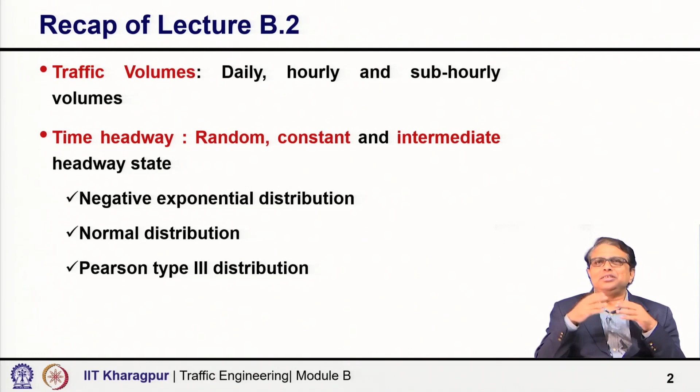At low flow level, it is something random. As the volume or flow increases and is near capacity, platooning happens and the majority of vehicles follow a constant headway; at intermediate flow levels, it will be something in between. I also explained with examples how negative exponential distribution, normal distribution and Pearson type 3 distribution can be fitted to observed highway data and how they represent it, primarily to conclude that the distribution of headway depends on the flow level or volume level.

At low volume level, the negative exponential distribution will reasonably indicate a good fit to the data, but as volume increases at high flow level, negative exponential may not work. In that case, Pearson type 3 distribution may fit better. So we must keep in mind the volume level we are considering when fitting a distribution to an observed data set, because the distribution likely to fit a given data will be a function of the flow level.

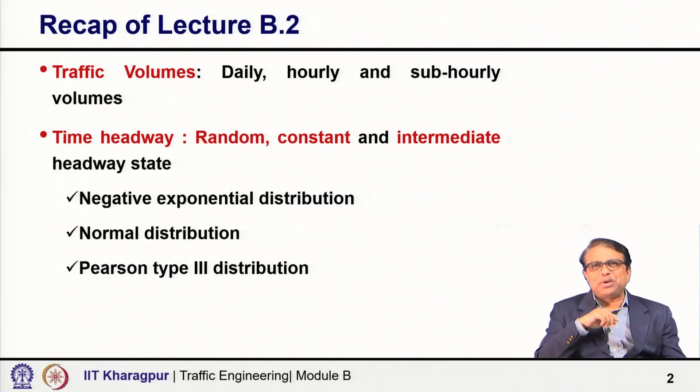Now, with this background, let us discuss traffic density and then the relationships. Density may be defined as the number of vehicles occupying unit length, say 1 kilometer of road, at a given instant of time. So how many vehicles are there occupying that 1 kilometer length? We can express density in terms of number of vehicles per kilometer.

A direct measurement of density is possible, but sometimes difficult in practical sense, because you need a higher vantage point from where you can clearly view a reasonable length of the road. You want to do photography or videography, so you need a higher vantage point and then focus the camera to take a snapshot or video. Such a vantage point may not be available in all contexts, at all places.

So the direct measurement may be difficult, but density can be computed using this equation: flow by speed. Flow unit is vehicle per hour, speed is kilometer per hour, so dimension-wise you get vehicle per kilometer, which is the unit of density. I will explain further how these relationships are valid and formulate this relationship in more detail to convince you better.

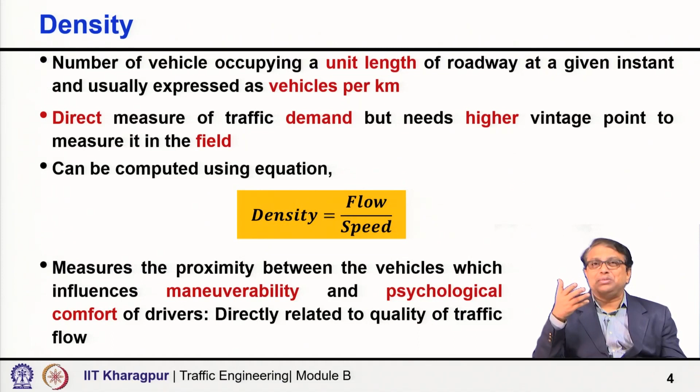Density measures the proximity between vehicles, which influences the maneuverability and also the psychological comfort of drivers. If you are driving a vehicle and all around you there are too many vehicles, that means density is high, and there will be a psychological effect on your driving behavior and maneuverability. That is why density is a very important stream parameter, which directly relates to the quality of traffic flow. Higher the density, the lesser the freedom in movement, and that way the traffic stream or driver behavior gets impacted.

Density can be expressed in the range starting from 0, because if you take a kilometer length of road during early morning hours, extreme lean hours, there may not be any vehicle. So you take a snapshot and you do not get any vehicle on the road—that is what is shown here, 0 density. If I take a snapshot here, I do not see any vehicle, and the road is marked for 1 kilometer, and over this length there is no vehicle.

So, the density is 0. On the other hand, at the maximum level, the density can attain a practical maximum value when vehicles are almost jam packed, one after another with minimum gap in between, minimum practical gap in between. So, that is the maximum density you can get under that condition. That is called the jam density.

The jam density is basically the highest value of density you can get. At that time traffic volume approaches nearly 0, because vehicles are practically not able to move. So, if you are counting the vehicles passing at a given time, you will find it is nearly 0. So, the volume is 0, the speed is also 0, because vehicles are not able to move, but the density is at its maximum. That is called the jam density.

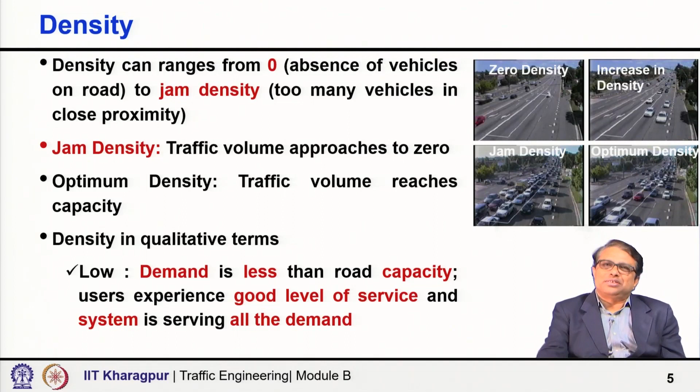At medium level, the demand is actually approaching capacity. So, the density is higher than the previous one, freedom of movement will be lesser than the previous state, and users are experiencing overall lower level of service, but the system becomes most productive in terms of vehicle kilometer travel. As I said, since you are approaching capacity, your throughput is actually maximum. You get a traffic volume which is almost equivalent to the capacity of the road. So that is, in one sense, the optimal use of the facility. You are able to discharge maximum number of vehicles through the road system.

Density could be even higher, and when will it be higher? When the demand exceeds the road capacity. Whatever the road can accommodate, you are trying to pass through more than that number of vehicles, demand is higher than the capacity, and then upstream of that section, not really at the bottleneck where the road is narrow, but upstream to that.

Suppose a 3 lane road is there and then gets reduced to 2 lanes, whatsoever may be the reason. Maybe the road could not be widened, or maybe some maintenance work is going on, and if the demand is more than the 2 lane can serve, obviously only 2 lane worth of demand can be served through that bottleneck, and upstream of that bottleneck where there are actually 3 lanes, the density will be very high, because the flow will be unstable in that section.

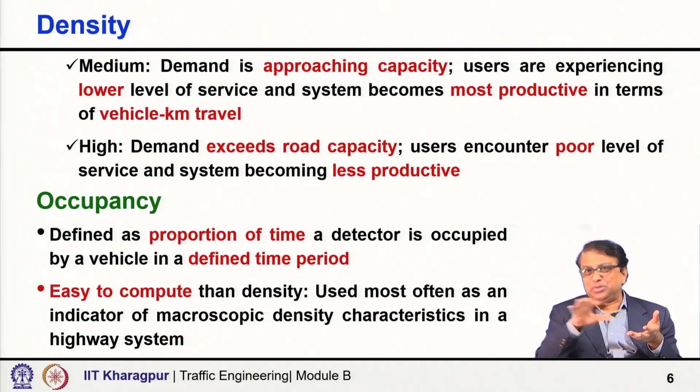It is easy to compute density from occupancy, and it is used most often as an indicator of macroscopic density characteristics in a highway system, simply because you can easily put a detector on the road and measure occupancy, rather than finding a vantage point to photograph the whole road stretch.

Once the occupancy is known, you can also calculate the density using this simple equation. OC is the proportion of time occupied by a detector, divided by VL plus DL. VL is the average length of the vehicle, and DL is the length of the detector.

Different vehicle types are passing through the detector, so you take an average vehicle length to represent the stream, and DL is the detector length. Why VL plus DL? Because if a vehicle is entering, the moment a part of the vehicle enters, the detector will show it is occupied, and it remains occupied until even a small part of the vehicle at the rear end is still on the detector. So it should be detector length plus vehicle length in the denominator.

Let us take an example. Suppose the detector records an occupancy of 0.2 for a 15-minute analysis period. If the average length of the vehicle is 4 meters and the detector is 75 centimeters or 0.75 meter, then what is the density?

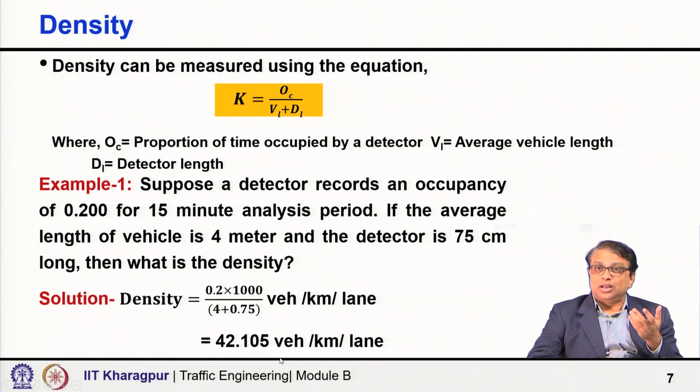You can directly use this formula. OC in this case is 0.2, VL is 4 meters, DL is 0.75 meters, and since we want to express density in vehicles per kilometer, it will be multiplied by 1000. So you get somewhere around 42.105 vehicles per kilometer per lane as the density.

Now going to another measurement, a microscopic measure. We discussed time headway, and here we are talking about distance headway. Time headway is the time gap between the passage of the same point by two vehicles, front bumper to front bumper. I observe the front bumper of a vehicle crossing this point and record the time, then the next vehicle's front bumper touches this point and I record that time. The time difference is the time headway for this pair of vehicles.

Similarly, what is the actual distance between front bumper to front bumper? That is the spacing, or space headway. I can take a snapshot and simply measure the distance between the front bumper of the vehicle in front and the front bumper of the immediate following vehicle. So spacing is in meters, meters per vehicle in a way.

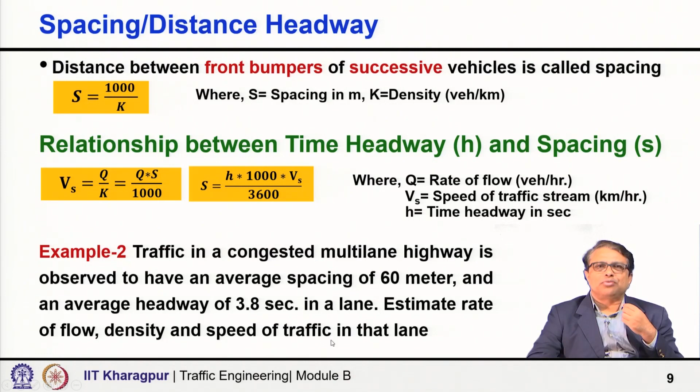Spacing is 60 meter. So what is the density? Density will be 1000 by 60, so 16.67 vehicles per kilometer.

I know that 3.8 seconds is the headway. So what is the flow? 3600 by 3.8, so you get the flow, and once you know the flow and you know the density, you can get the speed. Simply, speed will be flow by density.

Now let us take another example. Two cars A and B are moving in a racing track continuously for 2 hours. Assuming that no other vehicle is present on the track, calculate the maximum space headway between the vehicles within the first 1 hour.

The expressions for distance, that is d, distance travelled in t hours, are given separately for the two vehicles A and B. For vehicle A, dA equal to 60t, for vehicle B, the distance dB is equal to 60t square. So what is then the spacing at any instant of time? It is 60t minus 60t square, that is the distance between the two vehicles.

And we are talking about when the distance will be maximum. So we differentiate with respect to time. We take the derivative, ds/dt equal to 0, and you get t equal to 0.5 hour. 0.5 incidentally is within 1 hour.

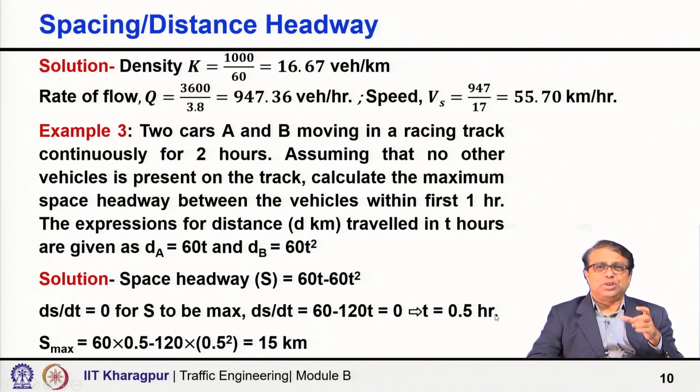And S max then will be how much? Simply put this time t: 60 into 0.5 minus 120 into 0.5 square. So you get 15 kilometer. So at 0.5 hour, the distance or the spacing between two vehicles will be maximum, and that is equal to 15 kilometer.

Now let us go to the next part. So far I have talked to you about the traffic volume, speed, and also in today's lecture first part I have talked to you about the density. Now these speed, flow and density are all related. So let us try to understand their relationships.

First let us see how we can convince you that there is a relationship. Let us consider q equal to rate of flow, vehicle per hour, k is the density, vehicle per kilometer, and v is the space mean speed. Remember that it is not TMS, it is SMS, because we are taking a stretch of the road and for that traffic stream as a whole we are saying what is the speed over that distance.

In this case, we will consider a 1 kilometer stretch now, so that is the space mean speed. Now if we consider 1 kilometer of road, then all the vehicles, each of them is travelling at the same speed, that is v kilometer per hour, and the density of the stretch is k vehicle per kilometer.

So by definition, how many vehicles are there within this 1 kilometer stretch? K number of vehicles, each travelling at a speed of v kilometer per hour. So if this is my first vehicle from the front, after 1 kilometer, the last vehicle I will get, if I count the vehicles, will be the kth vehicle, because the density is k vehicle per kilometer.

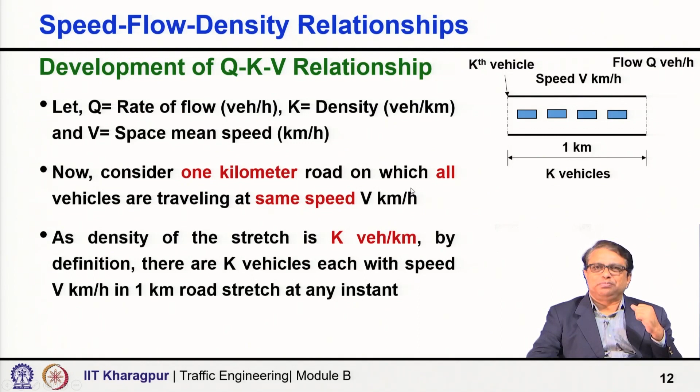Now if the flow is recorded at the end of 1 kilometer, if an observer is actually counting the vehicles passing through in an hour, the observer will get q vehicles per hour, because the flow rate is q vehicles.

So now you consider a vehicle at the start of the kilometer, that means the kth vehicle. How much time will it take to reach the end? That vehicle has to travel 1 kilometer. How much time will it take? It will take 1 by v hour, because the speed is v kilometer per hour, so in 1 hour I can cover v kilometer. So to cover 1 kilometer, I will take 1 by v hour.

So that is simple. But again, the kth vehicle will reach the end of 1 kilometer after k by q hour. How am I saying that?

Actually, 1 by q is what? Headway, time headway. So the kth vehicle to reach, how much time will it take? K into 1 by q, that much hour. So 1 by v equals k by q, and that gives you this extremely interesting fundamental relationship of traffic flow: q equals k into v, flow equals speed into density.

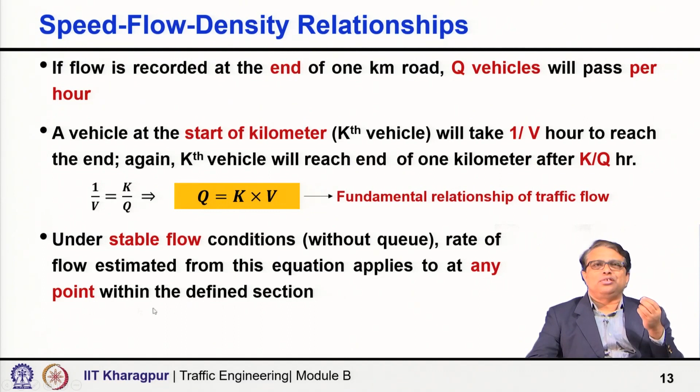Now, under stable flow conditions, all vehicles are moving steadily, not a stop-and-go situation. Rate of flow estimated from this equation applies at any point within the defined section. But if it is a forced, unstable flow, then it may change from point to point, not always exactly the same. Then the rate of flow computed from this equation will represent the average of all points within the section.

This relationship is often useful to estimate density. As I said, it is much easier to measure speed and flow rather than density. So once the relationship is known and you have measurements of flow and speed, you can calculate the density. This equation suggests that different k-v combinations can give the same q value, because q equals k into v.

So different k and v combinations can give you the same q value. Yes, that is true, but remember that all these values will change simultaneously, all these parameters will change simultaneously. So while different k-v combinations can give you the same q value, there are additional relationships that also have to be kept in mind.

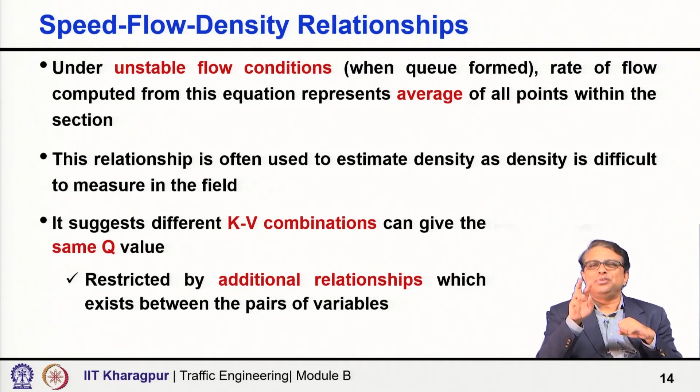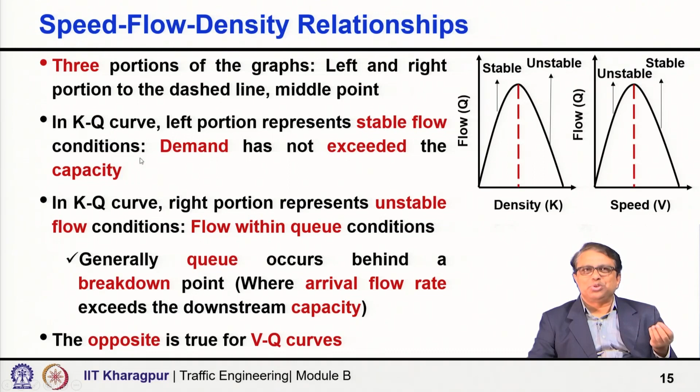The characteristics of the curves vary greatly depending on the local prevailing conditions. So exactly what the equation will be, I have not said so far. The equations may vary, the model may vary, it will depend on local conditions and so many other things, but the basic nature will remain valid.

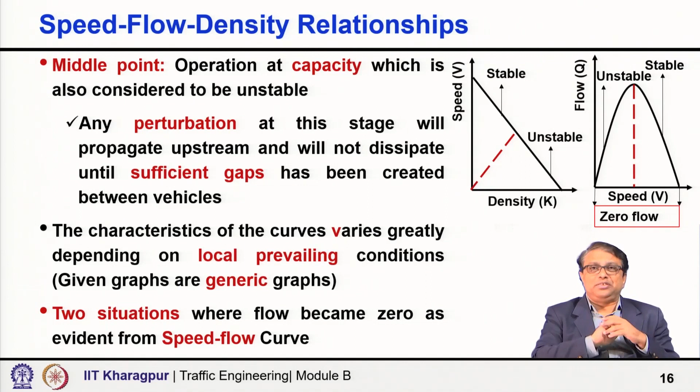Although speed density relation directly describes the behavior of drivers, most often the speed flow curve is used, as density is difficult to measure, the same point I have mentioned earlier.

Now let us consider some practical issues. Let us take a section of road, a 3-lane road, but in between a portion of the road has capacity of only 2 lanes. Maybe due to land acquisition issue you could not widen the road completely, or maybe there are 3 lanes but 1 lane is under maintenance or some construction is going on, so it is not in use.

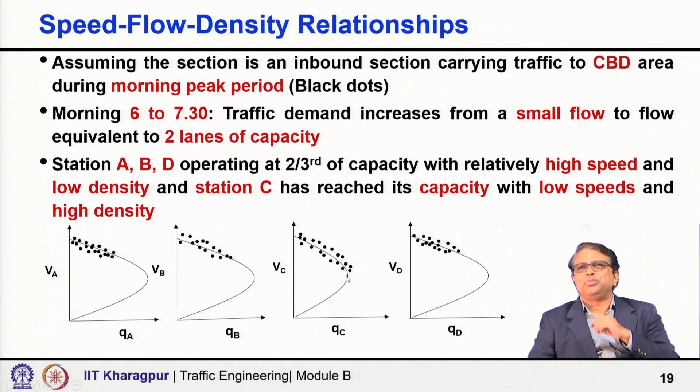Speed here will be higher because on the speed flow curve this point is at 2/3 of the capacity, whereas it has come down up to capacity. So obviously, the flow has gone up to capacity, the speed has come down further. So the speed of vehicles on section C will be lower, but anyhow all the vehicles will be able to pass through. Now, let us consider 7:30 to 8 o'clock.

Now consider that the demand is equivalent to the capacity of 2.5 lanes, not 2 lanes anymore, but further increased. So what will happen? This section's capacity is only 2 lanes, so only demand equivalent to the capacity of 2 lanes will be able to pass through this section, nothing more. And because only demand equivalent to 2 lane capacity will pass through this section, section D will only receive demand equivalent to 2 lane capacity, nothing more than that.

And there will be immediate accumulation of vehicles immediately upstream of section C, that is on section B, and section B will now go from stable operation to forced flow operation because of this bottleneck and excess demand.

Section A, which is further upstream away from this influence, will still have 3 lane capacity and it will operate with 2.5 lane demand without having much problem, because the demand is still less than the capacity. In section B, although there are 3 lanes, so capacity is not an issue, but the operation will switch over from high speed low density to low speed high density forced flow operation.

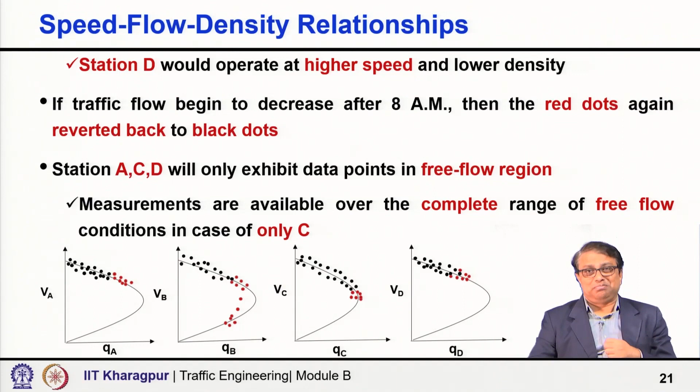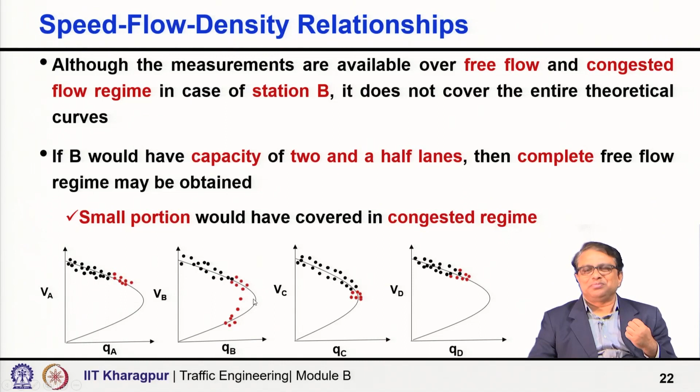So although measurements are available over free flow and congested flow regimes in section B, it does not cover the entire theoretical curve. If B would have had a capacity of 2.5 lanes instead of 3, some of the red points would have come here and also gone to force flow condition because of the bottleneck or the constrained capacity in C section, but you would have gotten some more points probably almost up to capacity.

So two important points to take away from this discussion. One, location limits the range of flow, speed and density values where you are measuring, and therefore for validation of models, the data set used may affect the results and comparison between models. I may not observe everything in every context. It depends on where I am taking measurements and under what traffic conditions. Only that will constrain what kind of data I will get.

Quickly I will show you two examples. This is the real world data for a high speed freeway. High speed freeway, normally we are able to cover quite a good range, low to almost near capacity, to some points even in the force flow range, but you can see you may not still get 100%.

So this example, the VK plot showed consistent data points and displays somewhat like an S shape or reverse S shape, whatever you say, and it gives an indication that free flow is somewhere around 60 km per hour and K jam is somewhere around these values, but I cannot conclude because I did not get points touching the K axis. So I still do not know. I know it came down almost up to 130, but it did not touch. So I cannot say that jam density is 130. I know it is even beyond that and I cannot tell the value.

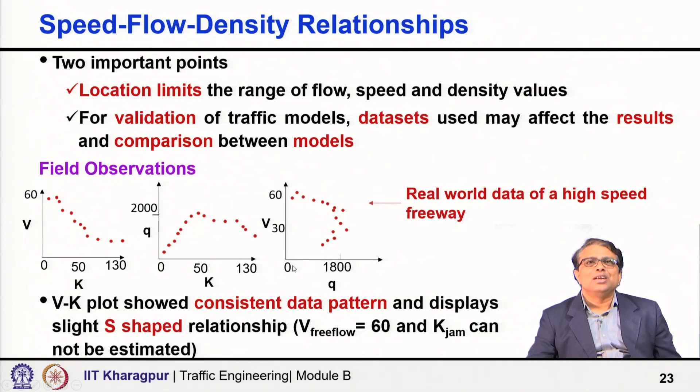Similarly, the free flow portion of the QK plot, if you see, looks like it is taking the shape of a parabola, but then the congested portion became somewhat flat. I probably did not get the full parabola either. It gave an indication that it is likely to be in the shape of a parabola, but for the congested portion I did not get points like that. I got somewhat flat points, indicating that the capacity is around 2000 vehicles, and the K optimum at capacity is somewhere in the range of 40-45.

And if you look at the VQ plot, it is consistent up to 1800 points, but then inconsistent afterwards, not really clearly telling the peak here, and V optimum is not very well defined, but we know it is somewhere in the range of 30 to 45 probably, that much. Whereas on an arterial road, if you collect the data, you may get entirely different types of points, because of the effect of a signal downstream.

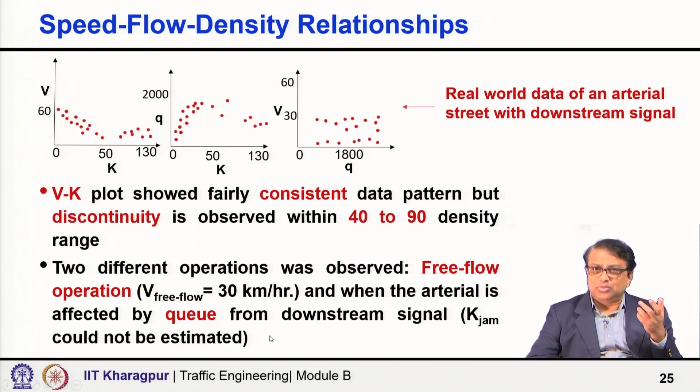K jam density I cannot estimate, because it did not really come to that point. Here also, not touching, right. So not very confidently can I estimate, and like that you will get some more observations as I have said here. But the essence is what?

The essence is that whatever theoretical shape I have shown—speed-flow, speed-density and flow-density relationships—the actual variation is true theoretically, but not always when you go to the field and collect data will you be able to construct or get that. The entire region, starting from free flow to capacity to forced flow, the entire range of operation, you may not be able to observe.

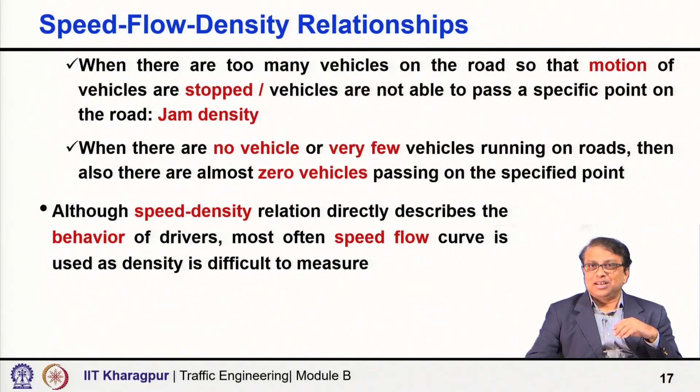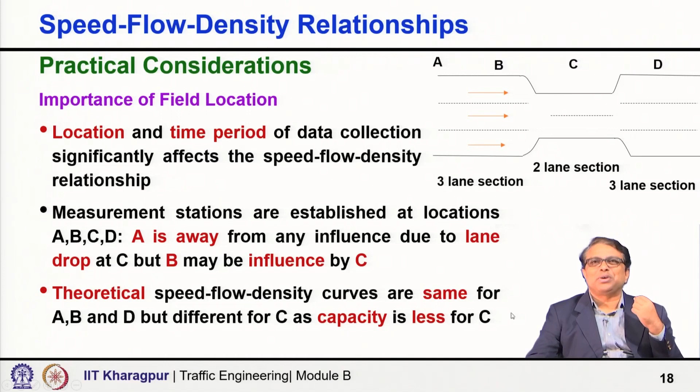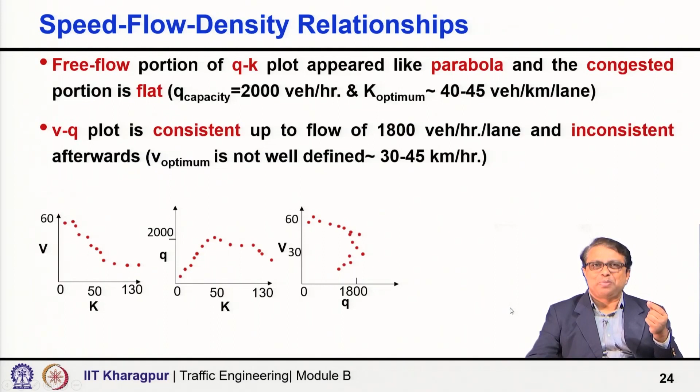It matters where you are collecting the data. The same data, as I said, we are collecting here at point D, point C, point B, point A. They will tell us four different things depending on what the demand is as compared to the capacity of this bottleneck section. So where you are measuring the data, what you are measuring, which period you are measuring—that is very, very important. So what you will actually get or observe depends on that.

So analysis of speed-flow-density relationship based on field measurement is a difficult task. Bridging the gap between theory and practice is really challenging, because the kind of data you get depends on where you are collecting the data, what time you are collecting the data, what the capacity is, how much the demand is, and so many other factors.

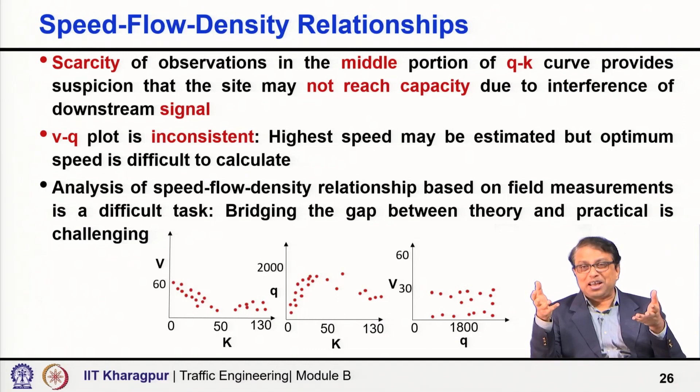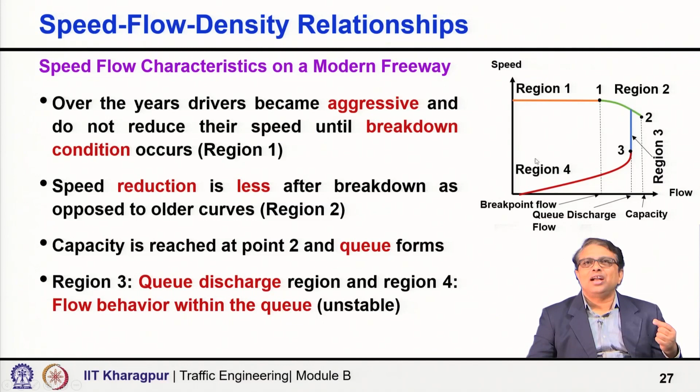Then 3 is the queue discharge part—you can call it the queue discharge region—and region 4 is the forced flow condition. So queue discharge flow is less than capacity, and the curve explains the experience of a driver when a breakdown situation occurs. Initially drivers move at higher speeds, begin to decrease speed slowly beyond the threshold point, but not a drastic reduction in speed. Then eventually they hit the brick wall as the queue forms, so speed drops from capacity to that experienced in the queue.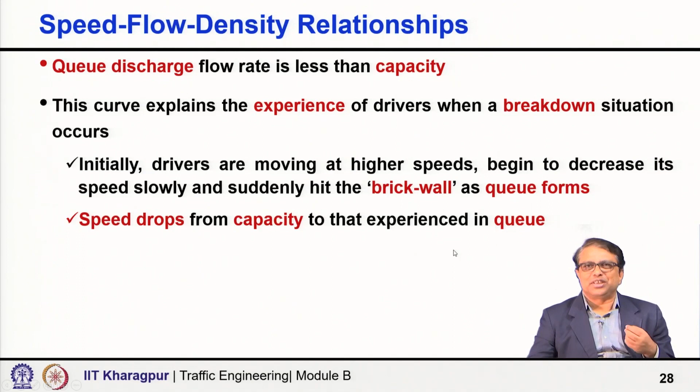So overall, here we talked about the macroscopic characteristic density and the microscopic characteristic occupancy, and how occupancy can be used to measure density. Then the relationship among the speed-flow-density curve, and individually speed-flow, speed-density and flow-density, and highlighted the importance of field location when collecting data and comparison with the theoretical curve. Also mentioned how the speed-flow curve may look for a modern freeway.